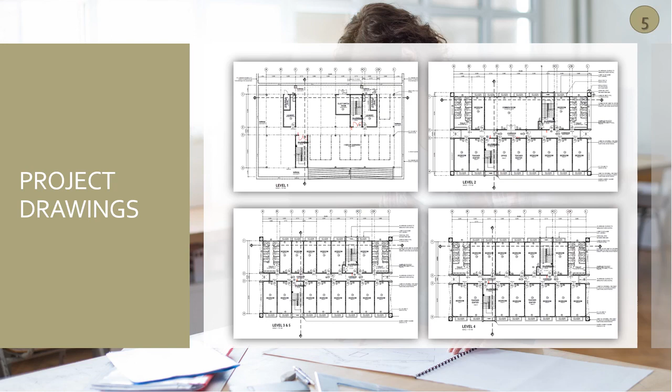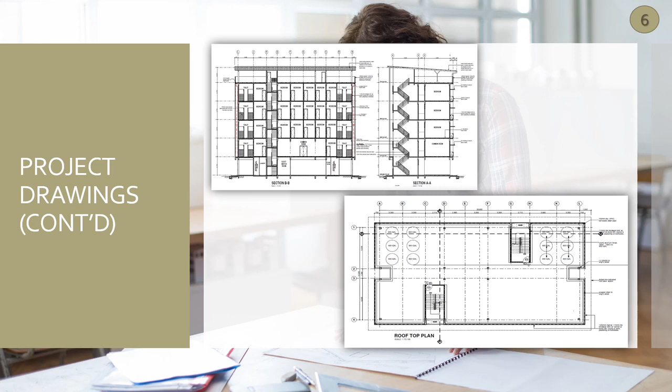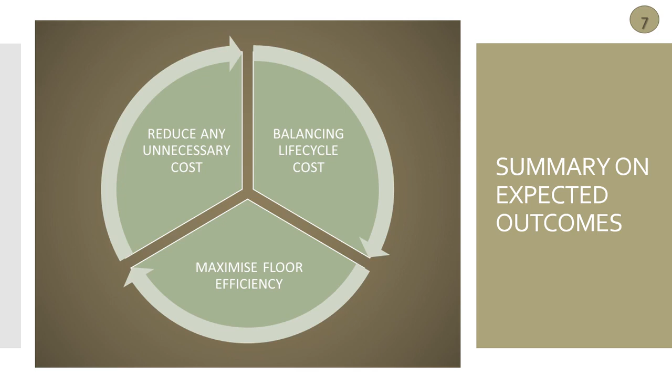Based on this slide, here are a few summary points on expected outcomes of the VM study. Firstly would be to reduce any unnecessary costs, changing of any brand and materials but still quality wise. Secondly would be balancing life cycle costs, a more efficient, suitable and adaptable approach for the alternative changes to be proposed and made. Third would be to maximize floor efficiency, where more spaces are able to be designed and provided by reducing non-usable space area.

The next part of this presentation video is pre-workshop. Pre-workshop can be defined as the assembly of project information, the selection of a study team, and the development of cost models and other resources to support the study. Other than that, the main purpose of the pre-workshop is to design and operate the workshop. This includes the support and commitment of top management of ministries and agencies, in addition to planning, reviewing and deciding on the division of responsibilities and duties to officers and staff involved in the study.

In value management analysis, cost reduction is achieved by making design more efficient without reducing essential performance, reliability, and maintainability. Traditional cost reduction efforts will concentrate on materials substitutions and reduce or eliminate specific elements, for example by changing the type of material such as from timber to concrete work. Any unnecessary specification can be substituted using this method.

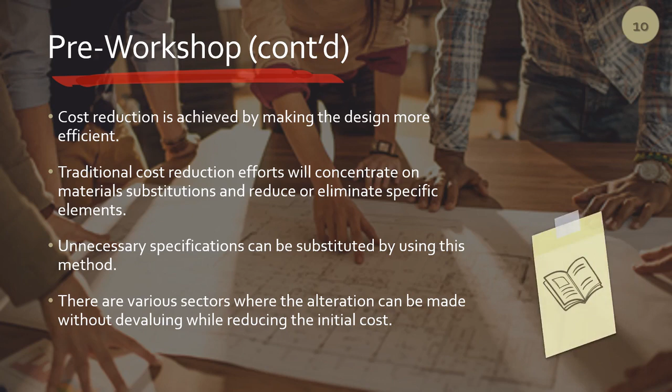Other than that, there are various sectors where alterations can be made without devaluing while reducing the initial costs. For example, the external ceiling finishes will be altered from ceiling sheet to skim coat because the overall cost is lower than the original plan.

Based on the diagram shown, there are 4 main activities that will be conducted, which is briefing, sketch plan, working drawings, and site operation. Briefing will include the inception and feasibility stage, while for sketch plan it includes outline proposal and schematic design. It is the early stage of every project with the participants of the client and design team.

For working drawing, it includes a 40-hour workshop, which includes detailed design, production information, bills of quantities, and tender. At this stage, it is more about cost control, where the cost plan and cost check will be done.

The last stage will be the site operation. At this stage, the value management proposal may or may not change according to approval of all parties during the workshop. The cost analysis will be done once entering this stage to make sure all the project reaches the main goal of value for money.

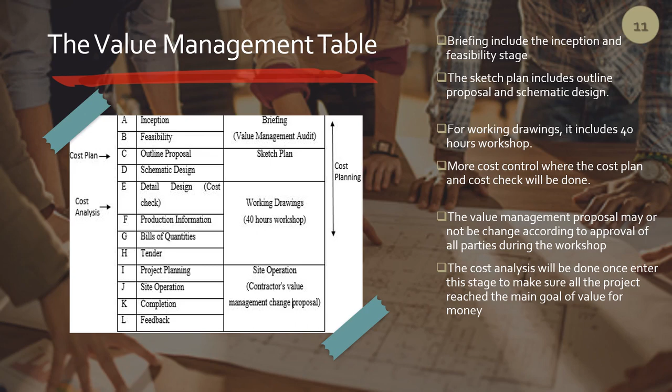The value management participants are divided into 5 categories: value study director, value manager, design team, quantity surveyor, and client. The value study director is also known as facilitator, a qualified and experienced person in managing the workshop. Their main job is to run the workshop smoothly.

The value manager is obligated to oversee the development of the entire project. Design team consists of architecture and engineer, both responsible to provide experience in the design stage and produce construction ideas. The quantity surveyor will ensure value management runs parallel to cost management, determining the best value for money without putting so much risk on quality. The client's role is to ensure the project will not be unfairly impacted on them. The client of this project will be Sabah Tshung Tsin Secondary School.

The next part of this presentation is the value management workshop. During the workshop, a new design team will be organized only for this purpose. The design team will review the design at 35% stage of the sketch design under the supervision of the value management facilitator. During the workshop, 40 hours is common, around 5 days to be completed.

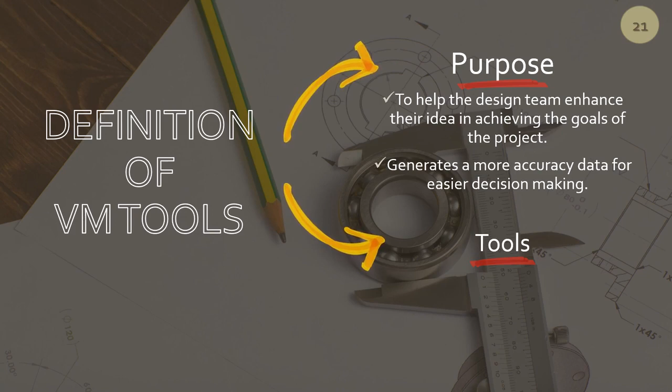Value management tools are able to help the design team enhance their ideas in achieving the goals of the project. They provide and generate more accurate data in assisting decisions made for the project. There are two types of value management tools. The first is functional analysis, which will be adapted in this project, and the second is the FAST diagram.

Functional analysis is a technique for analyzing the purposes of the constituent parts of a project. It is also used to identify the core function of products, processes, projects, or services. This is a very powerful tool, used to identify and determine the intended outcomes in order to eliminate or combine the functional space.

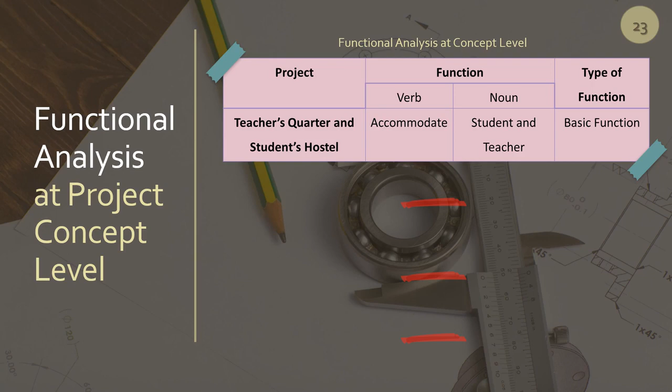For this project, it is focused on the basic function of the teachers' quarters and student hostel. For functional analysis at project concept level, basically this project is to accommodate students and teachers. The basic function of this project is bedrooms, located at Jalan Damai, at Sabah Sung Sin Secondary School.

The main function of these quarters and hostel is to create economic accommodation for students and teachers. The other function is to support activities for studies and working for the teachers.

Now let's see the overall functional analysis. For level 1, item number 1, laundry 1, it is provided in the project as a supporting function, originally 17.68, and it has been increased due to the omission of laundry 2, since laundry 2 is not necessary as there is already one at level 1.

For item number 3, the area was too spacious. Therefore, it should be reduced to 171.37.

Fourth is bedroom A, which is basically the basic function for this project. It is provided in the project, and the function is for resting for the student and the teacher.

It is the required secondary function for this project. The original area has been decreased from 50.57 to 43.03, due to the deduction made to improvise the bedroom A size.

In order to make bedroom A bigger, one of the rooms must be decreased, which is the toilet. It is not necessary to have a large toilet space, as there is a limitation for students using it. For example, if the shower is only provided for 4 rooms, they are limited to 4 students only, so it is not necessary to have a big space area just for 4 people.

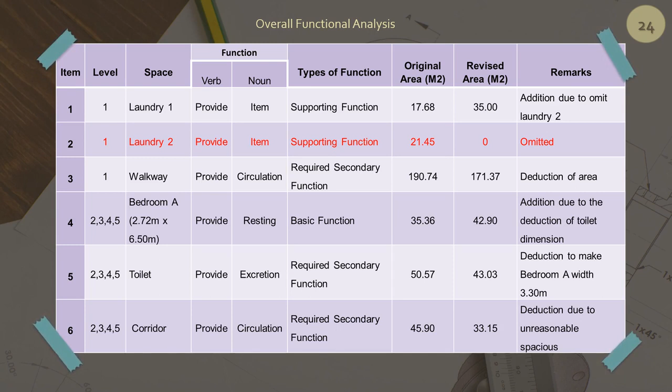Based on this slide, these are the second value management tool used for this project, which is the FAST diagram. FAST diagram is an evolution of the value analysis process created by Charles W. Bytheway. It enables the client and design team to focus better towards the main function of the product rather than the physical features.

On the left side is the fast diagram for this case study. Starting from the left side is how, and on the right side is why. Two actions were done simultaneously, which are to maximize floor efficiency in the green color box, and balancing the capital cost in the orange color box.

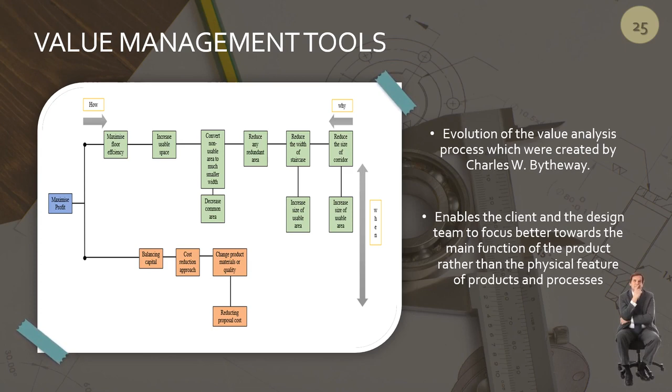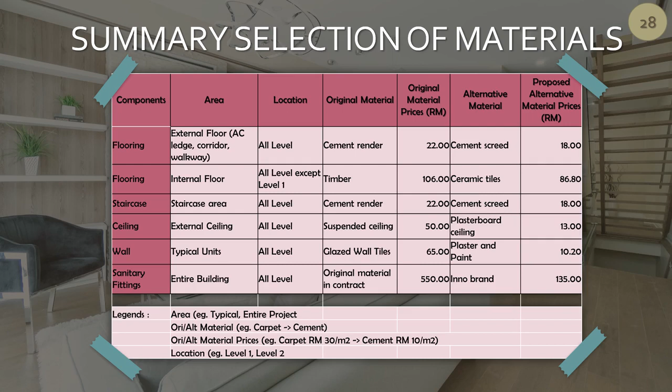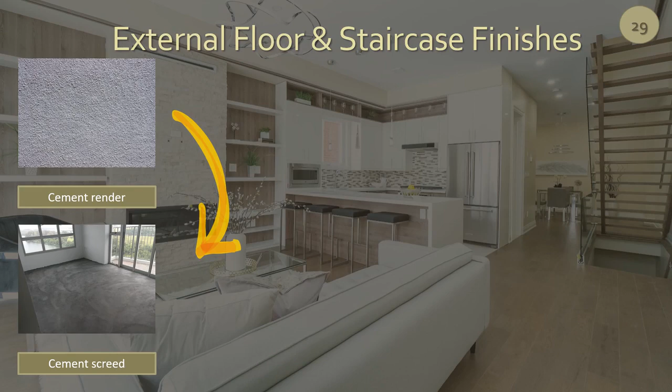Moving to the next slide. There are 2 items that will be changed to cement-screed, which are external floor and staircase finishes. The objective of changing the finishes from cement render to cement-screed is because cement-screed is lower in price compared to cement render. Apart from that, cement-screed finishes is smoother than cement render, as cement render produces a bit of a coarse finish. Moreover, it can be beneficial to the client as it is low in maintenance.

Cement-screed is easy to maintain as it can be cleaned easily with a neutral cleaning agent and water, while to remove visible dust and debris, vacuum and broom may be used. This way, the low price but good quality of material will satisfy the client, and hence value for money can be attained. In addition, it is also strong and durable. The strength, durability, and resilience of cement-screed can be a benefit as it does not get damaged easily.

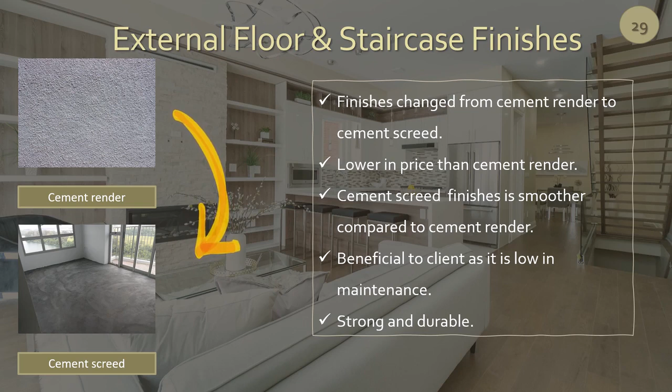For internal floor finishes, we change it from timber flooring to ceramic tile. The reason why we changed the floor finishes from timber flooring to ceramic tile is mainly because of the price difference. Ceramic tile is more economical compared to timber flooring. Furthermore, ceramic tile is as durable as timber. It can last for 10 to 20 years and even longer if properly maintained. This way, value for money can be achieved because of the low price but good quality of material.

The ceramic tile is also easy to clean and maintain because of its hard surface. Besides, ceramic tile comes in a larger range of colors and patterns. Therefore, the client has the flexibility to choose from any color that matches their preferences. Also, tile can be much simpler to place and can match just about any room compared to timber flooring.

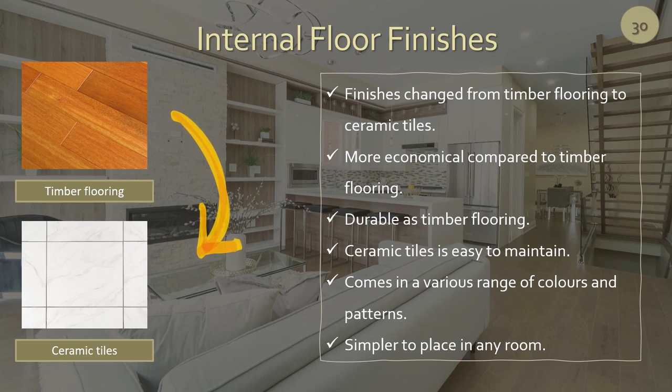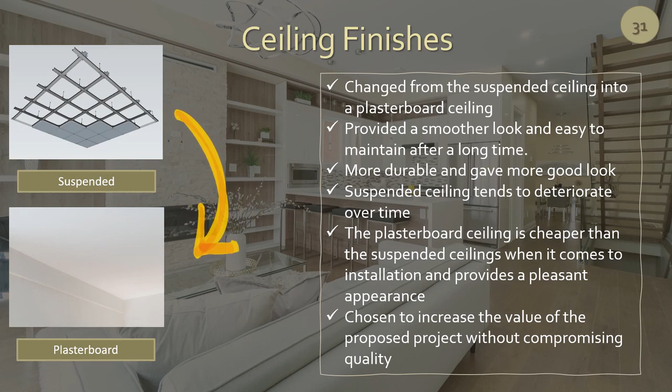The reason we chose plasterboard over the suspended ceiling is because plasterboard is more durable and gave a better look than a suspended ceiling. The suspended ceiling tends to deteriorate over time and absorb more moisture, which will lower the ceiling itself. It is also costly to paint a suspended ceiling compared to plasterboard. Overall, the plasterboard ceiling is cheaper than the suspended ceiling when it comes to installation and provides a pleasant appearance. So it is chosen to increase the value of the proposed project without compromising the quality.

We are going to explain more about the changes or material for the wall finishes. So for this proposed project, we opted to use plaster and paint, which replaced glass wall tiles. In terms of benefits, plaster and paint provides better results than most other wall elements, such as better maintenance, cleanliness, and capital costs.

Other reasons for changing the old material to plaster and paint is also because nowadays it is uncommon to apply wall tiles for the purpose of finishing. If done, it will much more depend on the client's request or room environment. Also, plaster and paint are suggested to be more suitable to apply onto a bedroom or office wall. Finally, this material will be beneficial to the client if they intend to make changes to the wall finishes in the future, as plaster and paint does not need complicated removal work.

For the sanitary fittings, there are 3 items that we discovered which can be changed to much more affordable material without affecting the quality of the project, which are washdown pedestal water closet, countertop vanity basin, and toilet roll holder. The reason we changed the original material to a much more affordable brand is because of the price difference. The brand is more affordable compared to the original material in the contract.

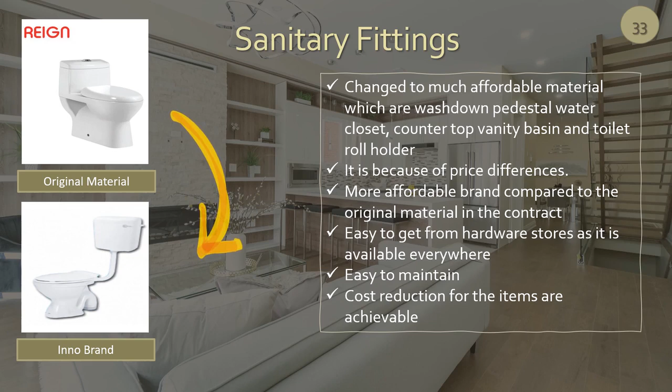Besides, the brand is commonly used in construction projects from teachers' quarters to school halls. On top of that, the brand is easy to get from hardware stores as it is available everywhere. It is also easy to maintain as the ceramic material used by the brand is very sturdy and can last for a long time. All in all, cost reduction for these items is achievable because of the low price without affecting the overall quality of the project.

Up next is the cost plan. This is the cost plan for the value management that has been done for this project.

It is estimated that the revised cost for internal floor finishes is about 100k. For the external floor finishes, the revised cost is about 9k. The overall revised cost for staircase finishes is about 3k. For ceiling finishes it is 91. Up next is wall finishes with revised cost of 17,000.

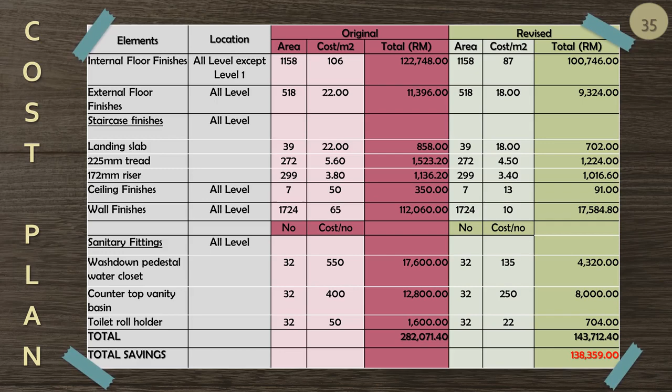Lastly is the sanitary fittings, which consists of washdown pedestal water closet, countertop vanity basin, and toilet roll holder. The overall revised cost for these sanitary fittings is about 13,000. So the total revised cost for the whole elements that we discovered is about 143,000. All in all, the total savings for this project is about 138,000 ringgit Malaysia.

This is the last part of this presentation, the conclusion.

In conclusion, value management is beneficial to all parties involved in the construction project management process. Value management leads to better and improved quality due to teamwork effectiveness. It leads to great performance, which in turn leads to more opportunities to succeed. Lastly, value management provides a platform to increase the worth of a project by taking several approaches such as cost reduction, changes of design and materials, and so on, in order to reduce the cost in a conscious manner.